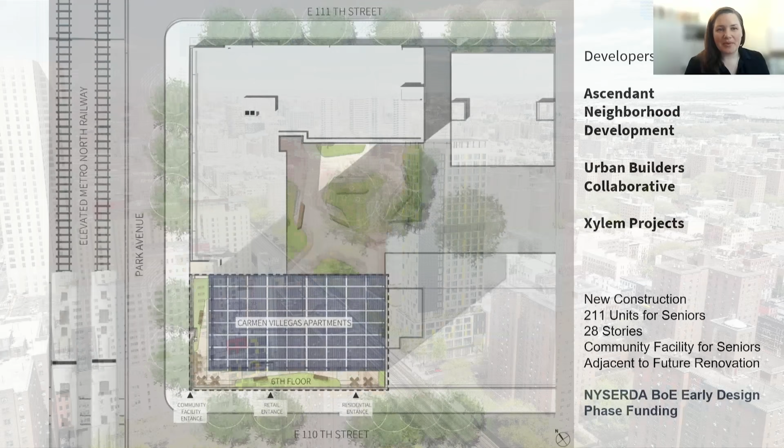Here at MAP, we are continuously searching for answers to these questions. Over more than 3 decades, we have designed 100 multifamily affordable housing developments. We believe architecture now has the tools at hand to get us close to carbon neutral and even reach for regeneration. In the next few minutes, we'll focus on how we approach the path to regenerative architecture through the lens of one project example. This Carmen Villegas Apartments project is a new affordable housing building located in Harlem for seniors from the community. In the future, the owners will conduct an energy renovation on the existing building on the adjacent lot to the north. So the new building design will be mindful of ways to plan for that as well.

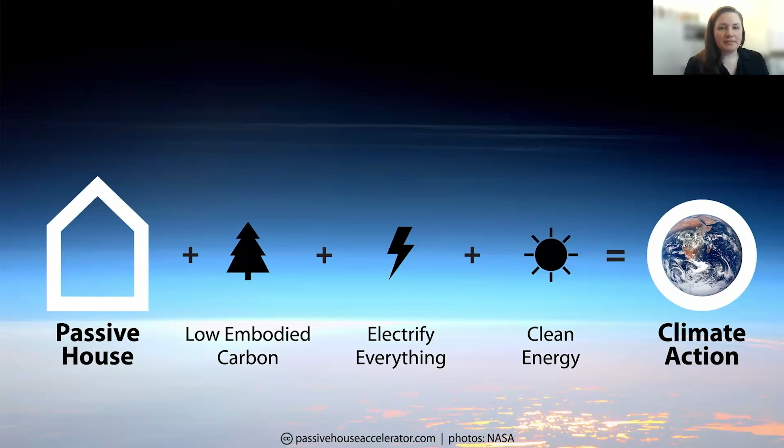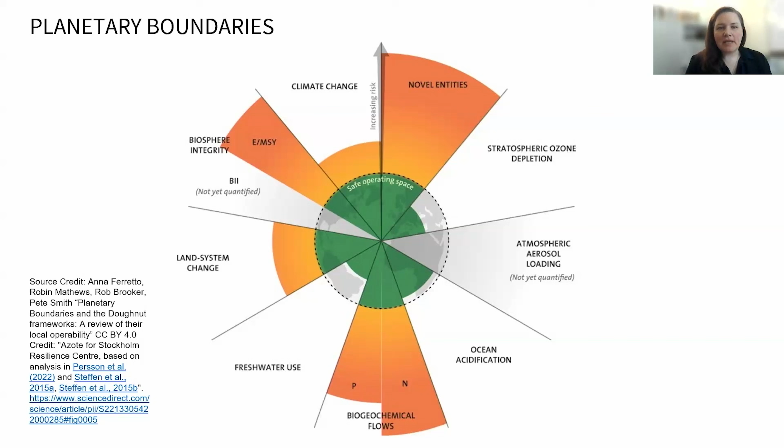The approach outlined here by the Passive House Accelerator and supported by many others is an excellent formula for addressing the climate crisis and allowing us to reach for regeneration. We are focused on the climate crisis, and rightly so, but it's important to remember that we're ultimately protecting biodiversity and healthy ecosystems that provide clean air, water, and nutritious food. The focus on climate is important, though, for sure, because if we have an unreliable and out of whack climate, this makes all of the other planetary boundary issues exponentially harder to solve.

So here are the other categories of actions we would add to the climate action formula to address those other boundaries. Every industry is expanding their view of what their impacts are, taking more responsibility. We are witnessing in real time this occurring in the construction industry, which is working to establish ways to measure the impacts of these actions and develop the tools to document and analyze them synergistically.

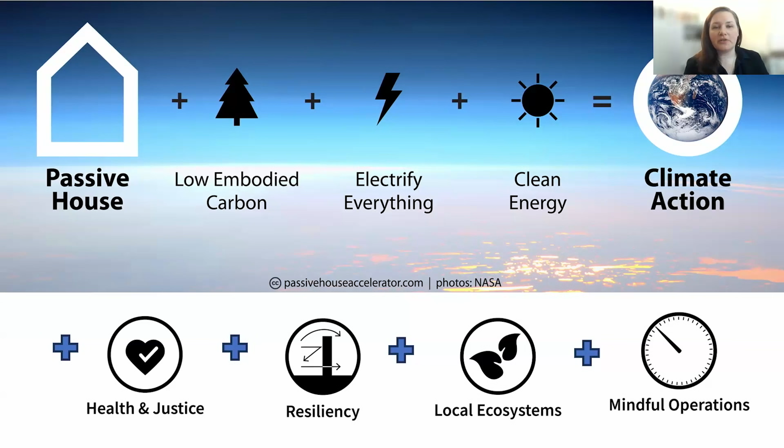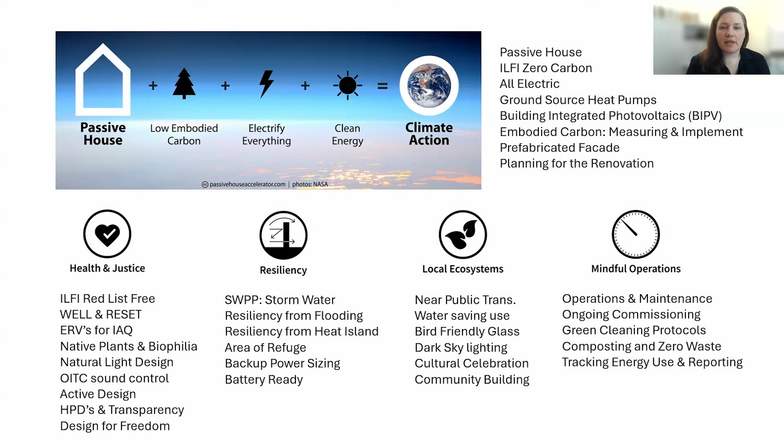You can see by this more detailed summary that there are many actions we can take towards carbon neutrality and reach for regenerative architecture. Many of these are overlapping categories, and they all reinforce each other. Some of them are even code minimum in New York City. Most here are being deployed by this project or being studied closely through the NYSERDA Buildings of Excellence Early Design Phase funding, with the entire project team of the owner, designers, engineers, and GC working together to figure out how to achieve these goals.

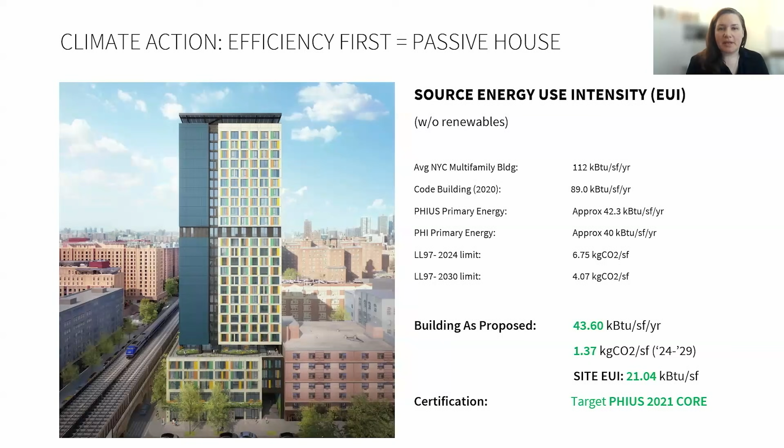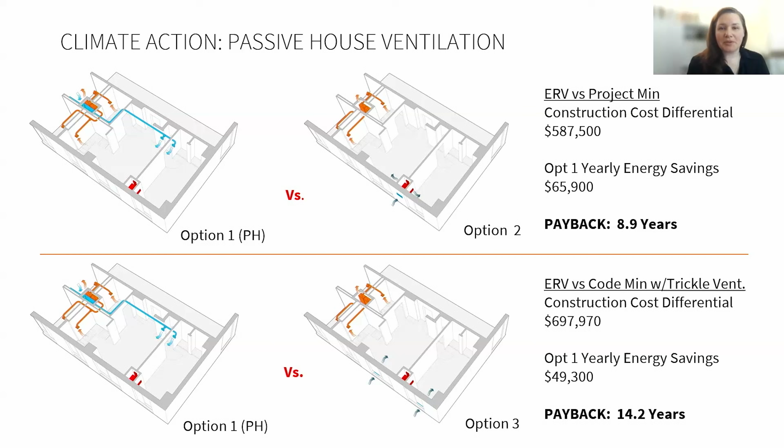To start, we begin with passive house design because it's the healthiest and most reliable way to achieve extremely low energy use. The project is committed to PHIUS certification. Before the project was able to commit to passive house, we needed to decide on a ventilation system to keep the project moving. So using a portion of the BOE early phase funding, we focused on calculating the construction cost and energy savings differentials between exhaust only and energy recovery ventilation. The paybacks shown here were acceptable to the team, and we locked in the ventilation strategy first.

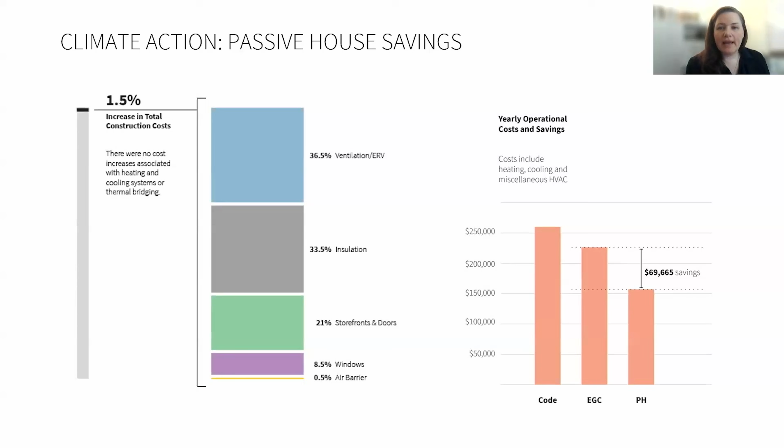Soon after, we were able to determine the upfront additional costs of passive house design and certification. With a baseline of affordable housing that's already 15% better than code, as it's required to be to receive any public funding, the additional increase was only 1.5% of total construction costs. This number, though, doesn't even yet calculate the savings from the smaller heating and cooling system, which we will calculate soon. And the yearly operational savings are about $70,000.

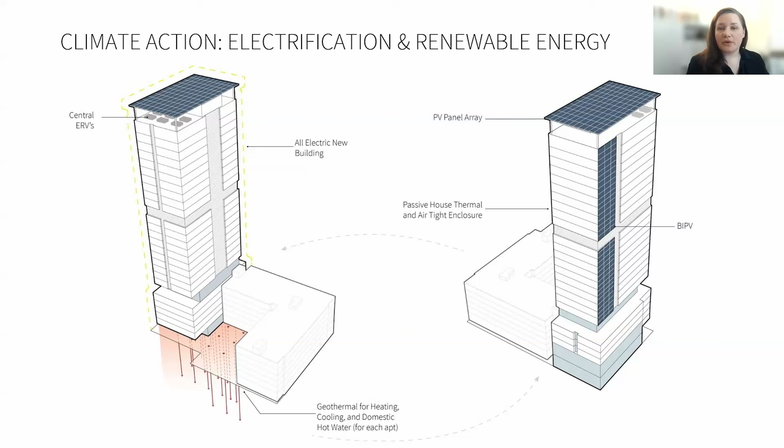The building is also all electric and will be provided with heating, cooling, and hot water by ground source heat pumps. The bore field is intended to be sized to reserve excess capacity for the adjacent renovation. A south-facing portion of the rain screen facade cladding will be building integrated photovoltaics, and there will be solar on the roof as well. Given that we have significant on-site energy resources and a low energy building, we are in the process of studying exactly how close we can get to net zero operational carbon.

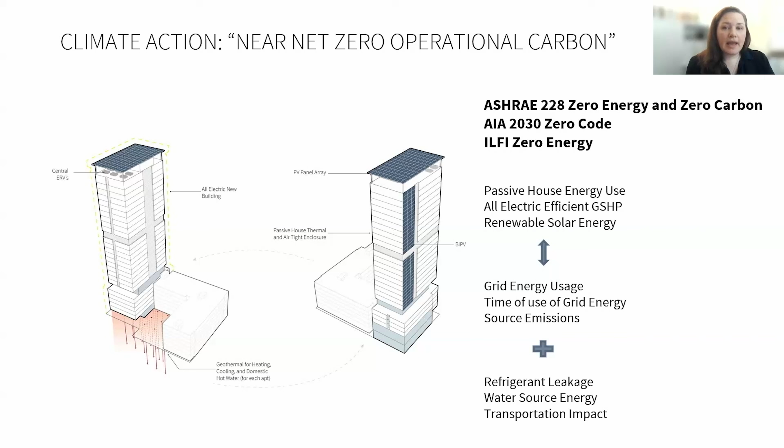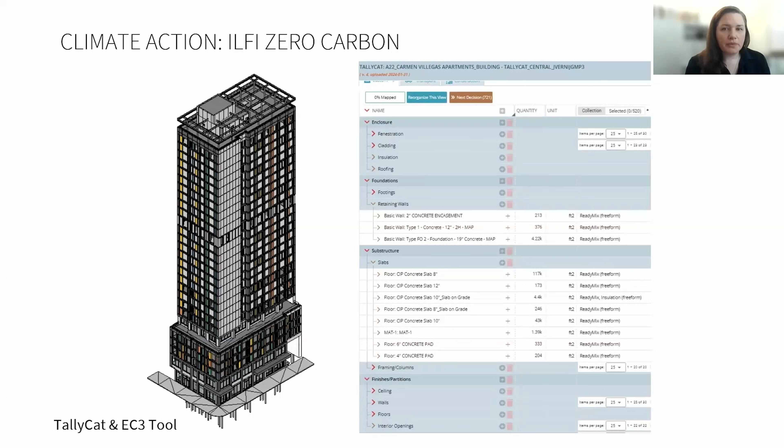There are several standards out there now, and more are being developed that help guide these calculations. They typically involve conversion to time of use, which takes into account the carbon intensity of the grid. And they calculate refrigerant leakage and other operational uses. We need to be mindful of the upfront embodied carbon we are spending in order to create this near net zero building and make sure we are hitting the sweet spot where we optimize both with the tools we have at the moment. To that end, the industry needs to increase our capacity to measure embodied carbon, so we are modeling using the TallyCat tool, which is connected to the EC3 tool.

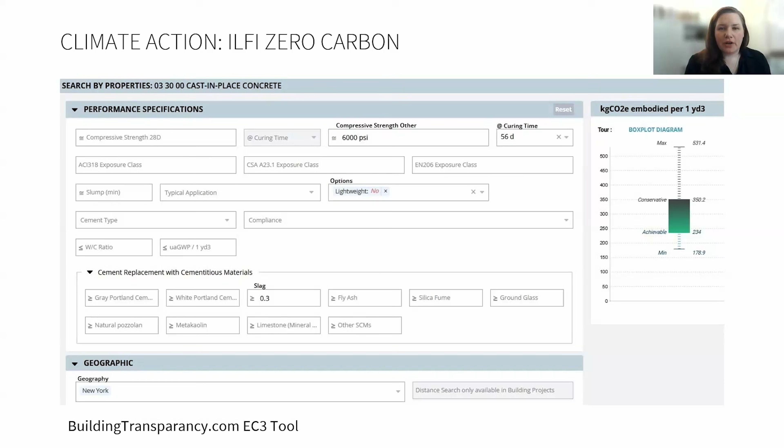The team is examining closely how we can lower the embodied carbon of each material. For example, we are using a combination of the search capabilities of the EC3 and collaborating with our GC's concrete suppliers to get the lowest mix possible. And we have a good start on this project by using prefabricated facade panels by Dextall.

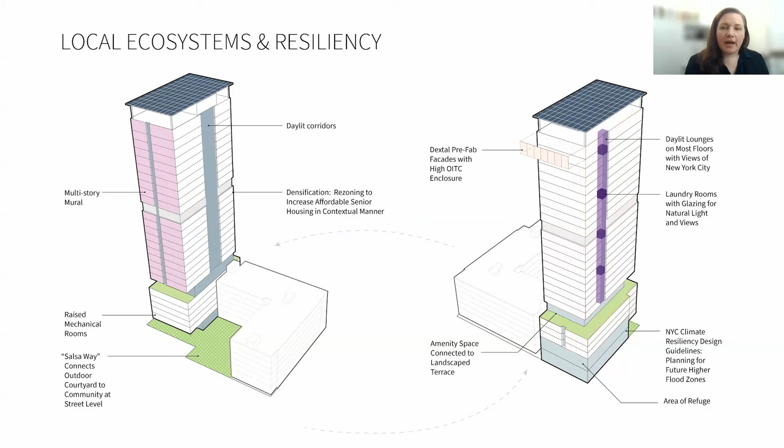The design honors the neighborhood's artistic culture with a large mural on the east facade and in the ground floor breezeway. This building is not currently in a flood zone, but it will be within its anticipated lifetime, according to the city's projected mapping. So the project will follow the requirements for flood zone resiliency, has a raised entry lobby, and the mechanical rooms are on the second floor. There will also be an area of refuge for the community.

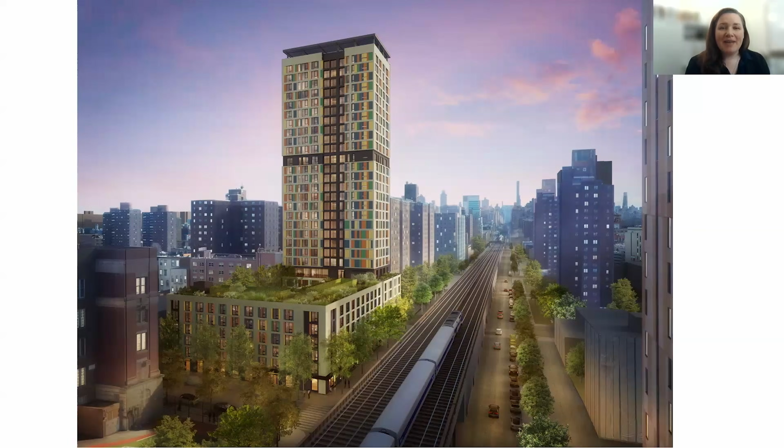With strategic support, such as from NYSERDA Buildings of Excellence program, we can leverage this exciting moment the industry is in and move the market forward towards regenerative architecture.

Thanks, Sara. That was wonderful. And again, very cool stuff. Everything that's in the building, everything we're learning from this, it's yet another great BOE project. I'm introducing Grayson Jordan, principal at Paul Castrucci Architects, who will be presenting the Bethany Terrace project, another Buildings of Excellence project.

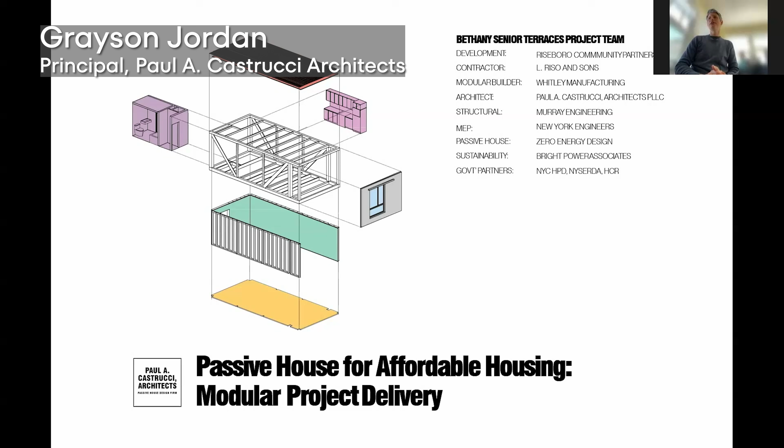Hello, my name is Grayson Jordan. I'm the principal architect of Paul A. Castrucci Architects. We're a full-service architecture and sustainability consulting firm located in the Lower East Side of New York City. We specialize in affordable housing and also in passive house buildings. I'm here to talk today about how to deliver passive house affordable housing using the modular project delivery method.

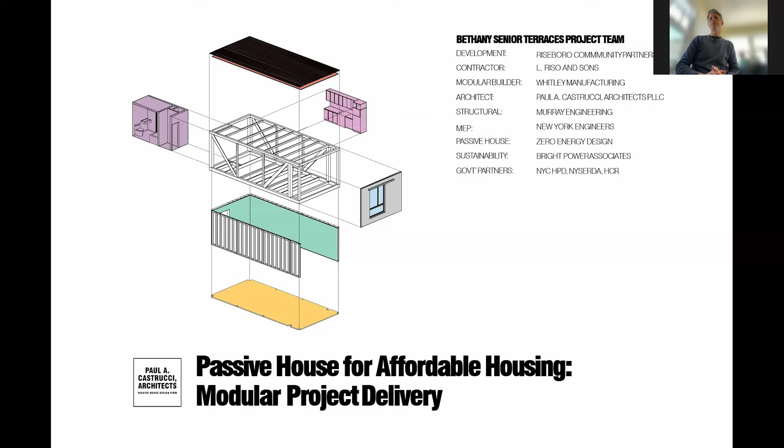Let's start with the why. Why do we care about affordable housing? It's critically needed. New York is a city of 8.5 million people with less than 400,000 affordable housing units. So we need to preserve existing affordable housing and we need to build new affordable housing. At the same time, we know that buildings in New York City account for nearly 2/3 of all of the carbon emissions in the city.

So on the one hand, we have to build and preserve. But on the other hand, we need to do that in a way that's actually not increasing carbon emissions, both embodied and operational, but actually driving it down. So deeply energy efficient, low embodied carbon, new construction and preservation.

Lastly, we are always looking to make places not just new affordable housing, not just energy efficient, but wonderful places to live, places people want to be, places of connection filled with light that are comfortable. And so we have a lot that we're trying to accomplish, often with limited budgets. So we need to explore new ways of building to get more value out of each project.

That brings us to Bethany Senior, a 60-unit affordable housing for seniors building that we're in the construction phase of in Brooklyn, New York. We're doing this with the developer RiseBoro Community Partnership, one of the leaders of affordable housing and passive house in New York, that brought us on the project. And very early in the project, we mutually said, modular is something that seems to make sense for this typology. Let's jump in with 2 feet and figure out how this works.

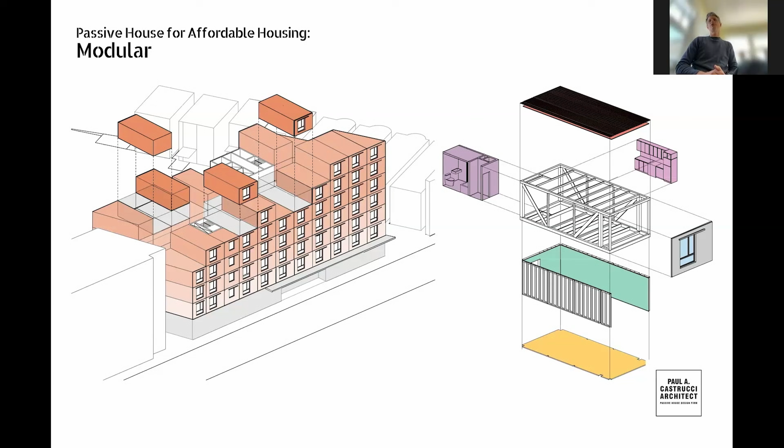Just to note, when we're talking about modular, we're talking about 3-dimensional boxes that are built off-site, shipped to the site and stacked up almost like little Legos on site. This is opposed to something else that our firm and many other firms are doing, which is prefabricated wall panels. I also heavily encourage exploring this avenue, but prefabricated wall panels is more putting panels on superstructures built on site. Today, we're talking about 3-dimensional modular.

When we think about modular, the first thing we would want to know is how is this going to affect our design process? We have to think about things a little bit differently. First of all, we have to think about transportation and staging. We're seeing here a delivered modular box. So the first thing you need to know is, how are we going to get this box from the factory, in this case in Pennsylvania, to New York City? We're going to map out all the routes. We're going to look at bridges, tunnels, any obstructions, and that's going to help shape what each mod looks like.

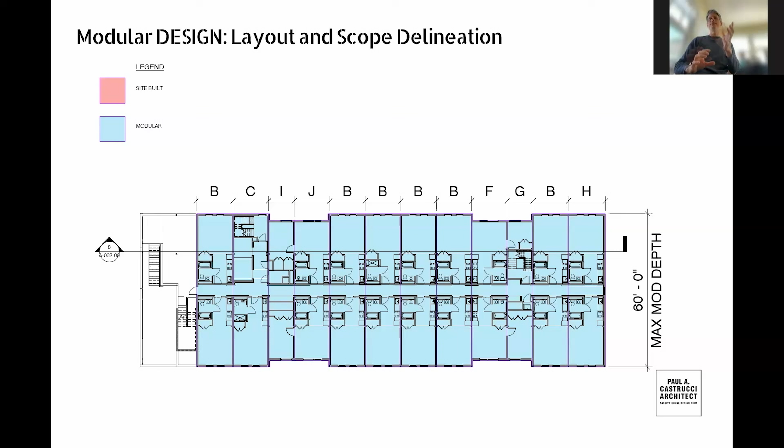Then at the building planning stage, we're looking for hyper-rational layouts. We're looking for repeatable, very efficient layouts. This can lead to, if you don't do it right, some sort of formal stagnation. So we have to take these very rational units and lay them out in creative ways. But with modular, it's very important to stay hyper-rational in your layout.

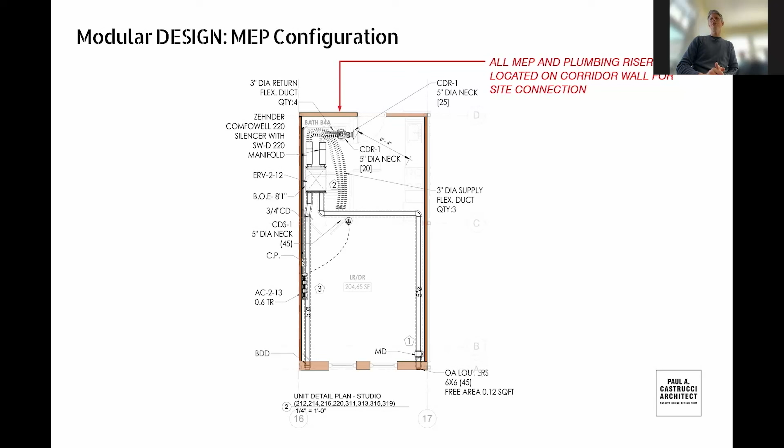We're also going to look at our MEPs quite differently. We're going to completely build all of our plumbing and mechanicals in the units, and then put all the risers on the corridor so they can be easily connected in the field. This is quite different from traditional construction. And finally, we know that design isn't just a series of technical decisions. We care a lot about conceptual and aesthetic response.

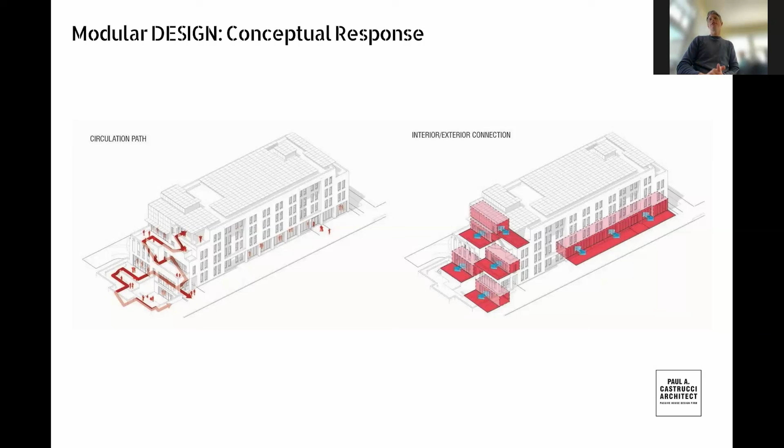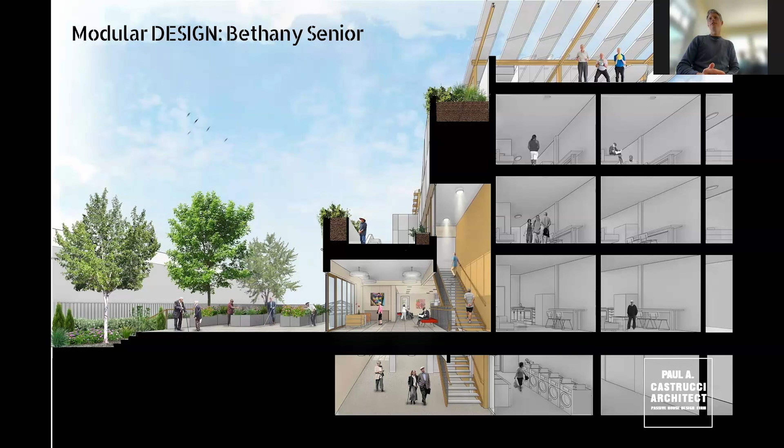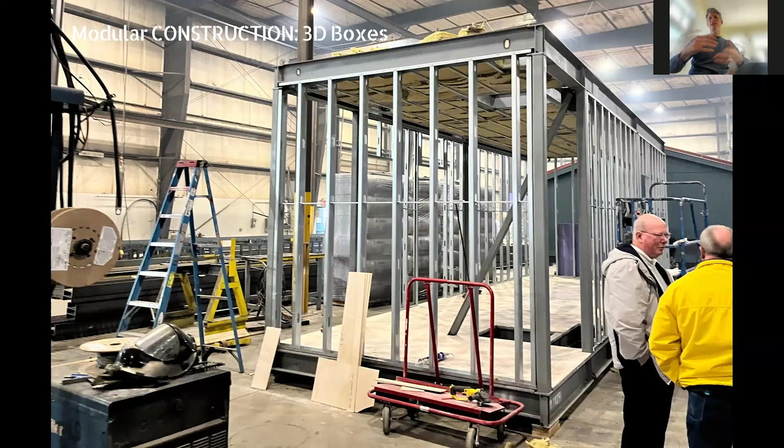We start to fill these in with stud construction. Then we layer in all the rest that goes in the building, again, sort of on an assembly line approach. We're going to put all of our insulation, all of our electric, all of our plumbing inside and build it actually in these units, and then follow up with finishes.

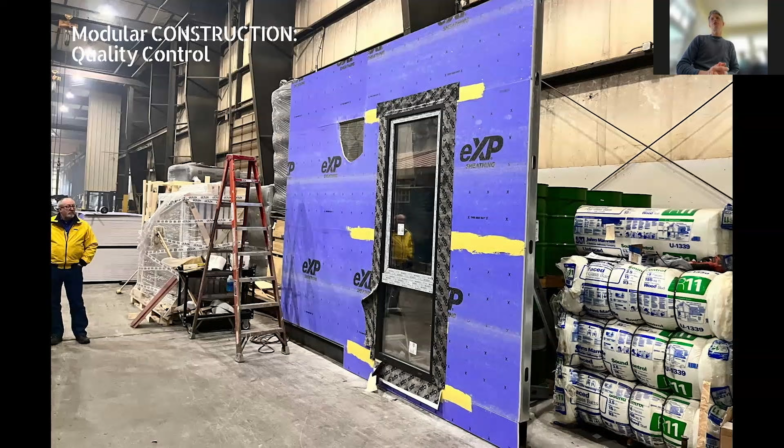One thing to note, quality control. Quality control is important on any project, especially with new partners. I think modular gives us greater ability to quality control. We can do this all inside. Here we're looking at a very important detail for Passive House, which is the window detail. And we did this a few times. You can see we've done a pull-up test on the bottom left, and we had this detail redone until we got the adhesion that we wanted.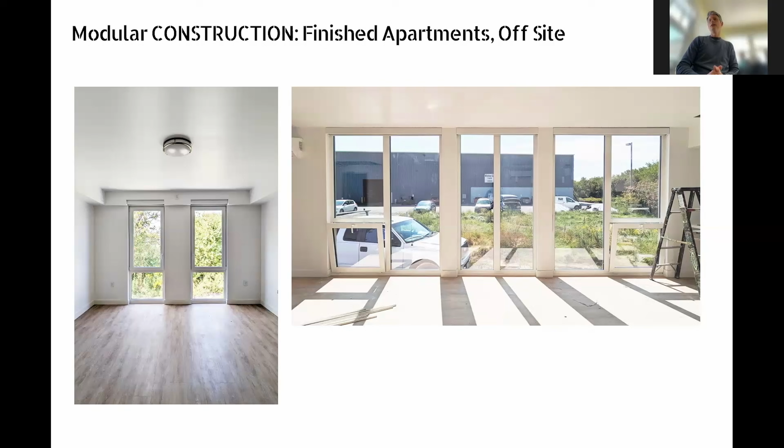Finally, one thing to note, in this modular construction, these units are nearly done in the factory. So we're looking at finished apartments, finished floors, finished ceilings, kitchen cabinets, plumbing, almost everything except for the appliances, which are shipped loose so they don't rattle around during shipping. And this is done in the factory and then shipped to site and stacked up.

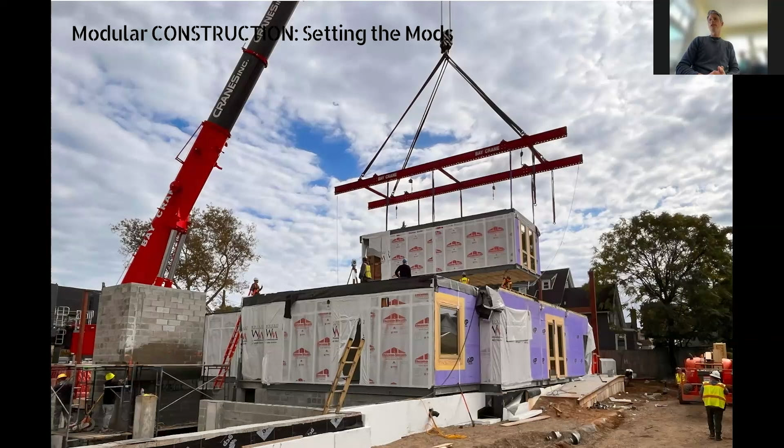We start with the foundation. The foundation is done while we're building the mods in the factory. And we'll get these stacked up from nothing, just the foundation, up to a 4-story, 60-unit building in 2 weeks. And so that's going to be 60 units of fully completed apartments stacked up in 2 weeks. There's a bit of work to do after this is set.

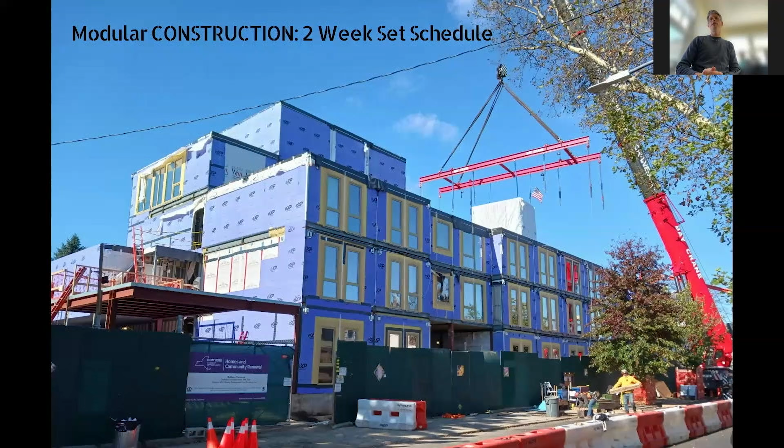As you can see, there's quite a bit of exterior work. So all of the exterior air barrier and insulation and finish systems happens after the stacking. And then, as we noted before, there's quite a bit of connecting mod to mod of your sprinkler, your plumbing, your electric systems in the corridors, and the corridor then has to be finished. And there's some ship loose items such as the appliances that we're seeing here. And if we have, in this case, very large light fixtures that we don't want swinging around, those will be installed in the field as well.

To summarize, this is our first modular project. I think in many ways it's a good success. We learned a lot of lessons. I think this is a strong way of building that we should be doing more of, and we should be sharing our lessons learned, because I think that this is a way, especially in affordable housing with reduced budgets, to get really exceptional buildings, passive house level performance at the same cost or even reduced cost.

Enjoy. Thanks. I'm presenting our 3 buildings that won the Buildings of Excellence Award from NYSERDA in recognition of their ultra-low energy design as the first passive house projects for the Hudson Yards area of Manhattan. The site, Hudson Yards North, is located immediately above the new skyscrapers that define Hudson Yards. Midtown lies to the east with major bus and rail transport hubs nearby.

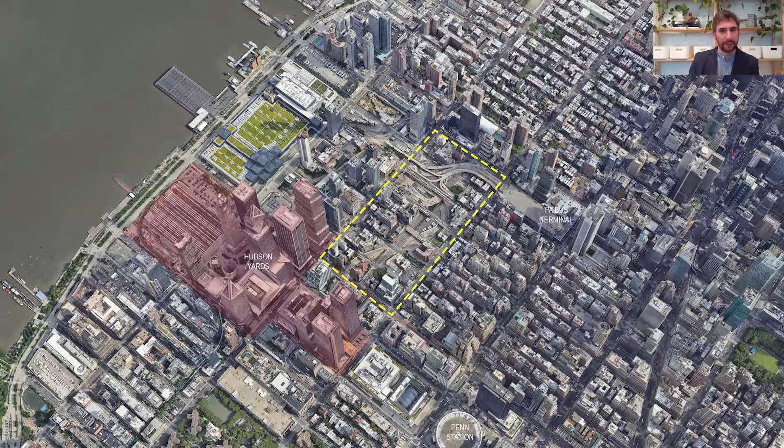Unlike the surrounding context, the blocks of Hudson Yards North are marred by the Lincoln Tunnel infrastructure carved out of them, resulting in a heavily trafficked, relatively lightly developed neighborhood. These 3 buildings are located across 2 sites. 2 buildings are corner sites that face 9th Avenue and back onto the Lincoln Tunnel entry. The third is an infill site at West 36th Street, near where the tunnel exit meets the city grid.

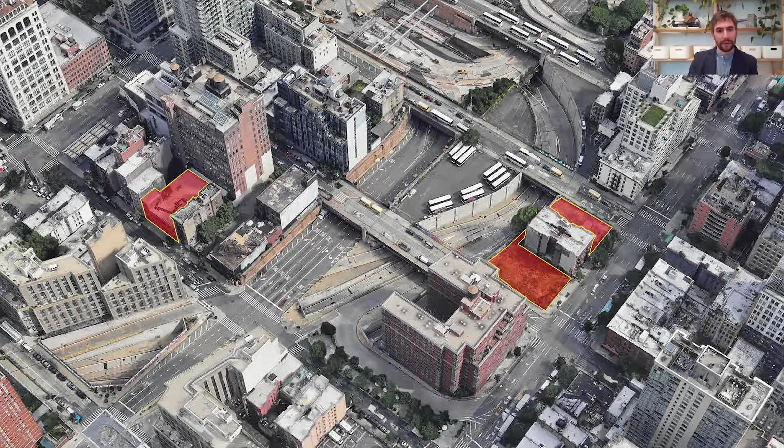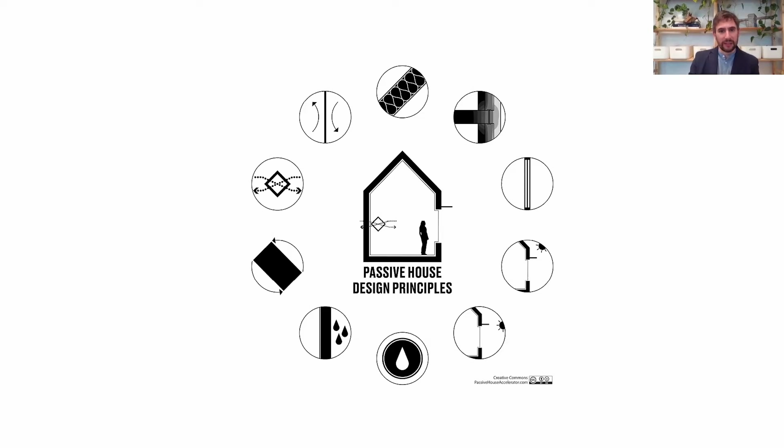We pushed for passive house early on in this project, which the client was quick to embrace, as this would not only be appropriate from a macro environmental standpoint, but would also impart many micro environmental benefits for these particular sites. A healthy, quiet, and comfortable environment for the end user is a valuable sales pitch when your neighborhood is one of the most heavily trafficked areas of Manhattan.

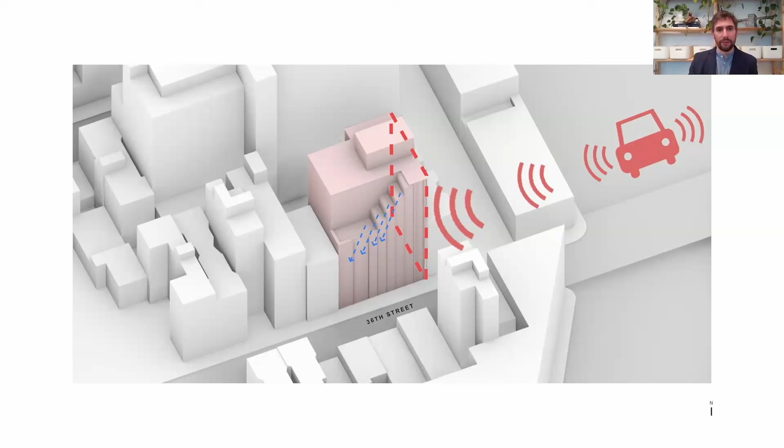Both of these sites fall under a contextual zoning district, which limits the permitted height and dictates specific setback requirements. Working within this framework, the 36th Street site was configured to orientate itself away from the heavily trafficked tunnel exit and provide views, particularly for the upper units, towards the river and the new Hudson Yards development. In plan, this meant pushing the cores to the easterly side of the site with unit arrangements organized efficiently around them. This also allowed for a maximum commercial footprint at the ground floor.

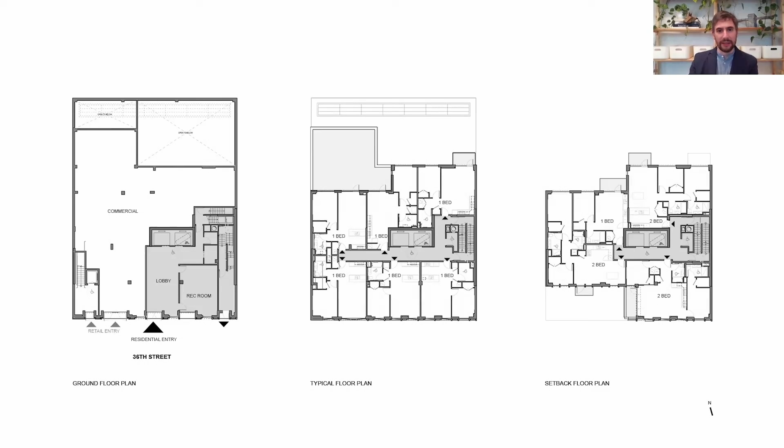At the setback floors, a permitted dormer extends the building to the street line at the southeast and reduces at each floor in accordance with the permitted zoning envelope, resulting in the tiered massing. This massing informed the cladding design that is expressive of this gradual stepping with projecting vertical fins that curve to become horizontal at the respective terminating floors. In addition to the aesthetic expression, these fins also provide passive shading to the windows and reinforce the idea, even at the lower floors, of orienting the views toward the west.

Looking at the facade in greater detail, the cladding is a composition of ultra-high performance concrete panels, or UHPC in short, with metal infill and metal spandrels. The panels are organized in a double height stagger pattern, which reinforces the tiered massing and produces a tectonic logic for the cladding. A slight tonal differentiation in the cladding delineated the setback portion from that of the street.

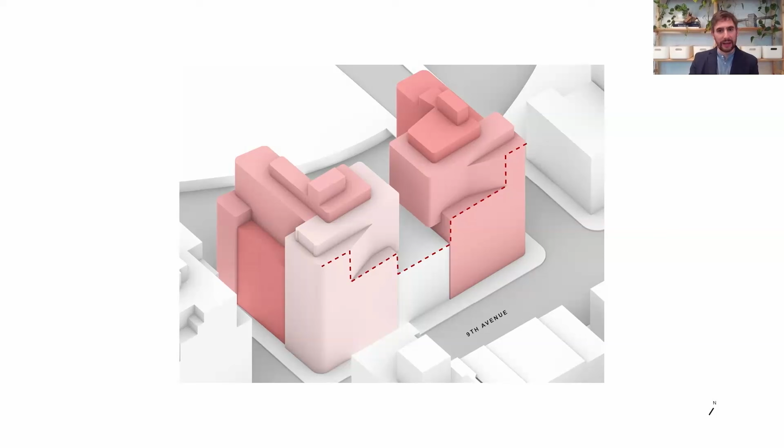The 2 buildings at 9th Avenue have a very different contextual relationship, as both buildings occupy a corner site with the sunken tunnel entry at the rear, making every elevation visible from the street. On 9th Avenue, we wanted to be respectful of the existing building, which in order to use up all the floor area available is being cantilevered over. To that end, we stepped the street wall up from the middle with the greater bulk located at the corners. At the back of the building, we opened up 2 courtyards to provide light and air to all the residential units, which also opened up the opportunity to introduce daylight into the cellar spaces.

As the contextual zoning required setbacks, we worked within these parameters to inform a massing that is broken up through subtle changes in the street wall, as is further expressed in the cladding articulation. In plan, each building has a double height lobby and a recessed entry off the side street. This gives a residential entry that is both generous and formal, but also expresses its semi-private nature. Pushing the residential entry to the side street allows the 9th Avenue frontage to be fully dedicated to commercial uses, adding more life to this stretch of 9th Avenue.

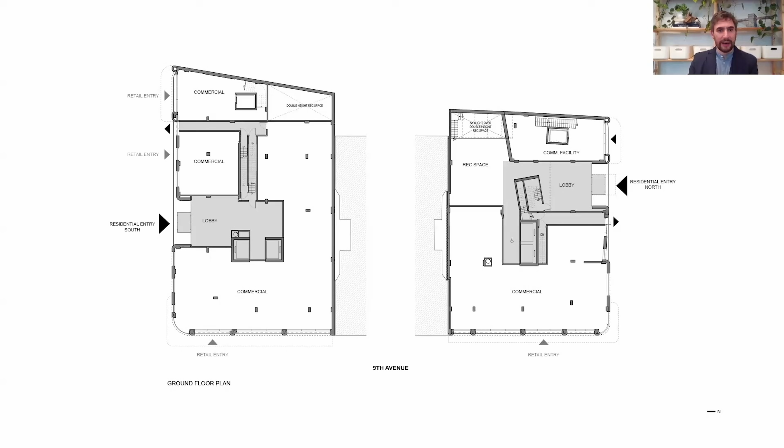As we move up through the residential floors, we can see how the courtyards serve to give light, air, and views to the rear-facing units, but also open up the elevator lobbies to receive natural daylight as well. The buildings take advantage of the unique setting to provide generous curved windows at the corner, thereby opening up expansive views for many of the units.

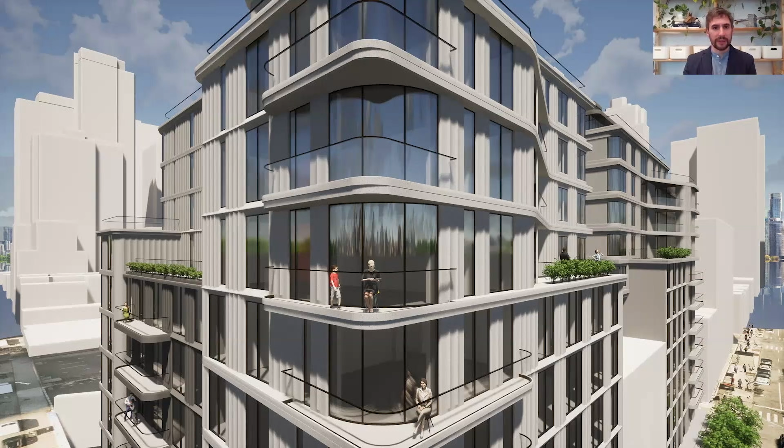The curved corners represent a softening of the building form, which is picked up in a cladding expression of subtly fluted, repeating vertical elements bisected by stronger horizontal lines. Sometimes these are simple floor delineators where the slope helps to express the vertical fluting, elsewhere they become a stronger datum, either forming a horizontal articulation on the facade or projecting deeper to become a balcony. Like our 36th Street building, these 2 buildings are also clad in UHPC panels. Subtle variations of the cladding tone differentiate the various forms as expressed in the earlier massing slide. In addition to providing spectacular views, the curved windows also open up the opportunity to have more generous balconies within the limited projection permitted over the property line in New York City.

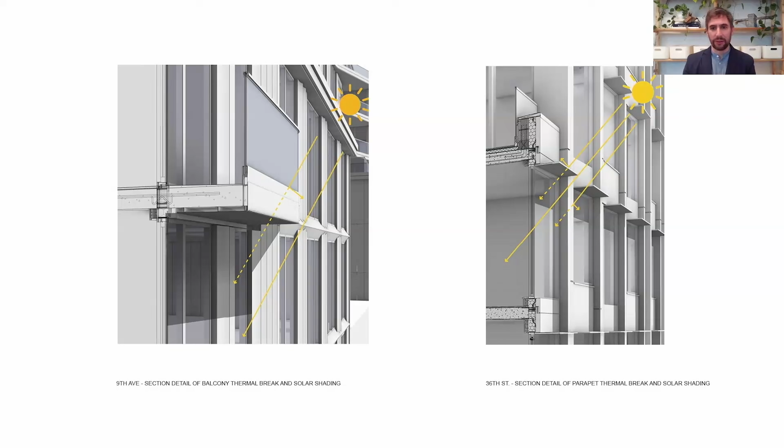Both buildings benefit from a shading strategy integrated into the cladding design, whereas 9th Avenue utilized balconies and horizontal articulation to provide shading to a significant percentage of the windows. 36th Street achieves this through both the vertical fins discussed earlier and a horizontal sunshade that forms part of the window system. In order to maintain the continuity of insulation, both buildings utilize concrete thermal breaks in the balcony construction and in the upstands at roofs. With the upstands, this was particularly beneficial in maintaining the continuity of insulation while also providing a simple fixing zone for the parapet cladding and railing without having to worry about additional roof penetrations.

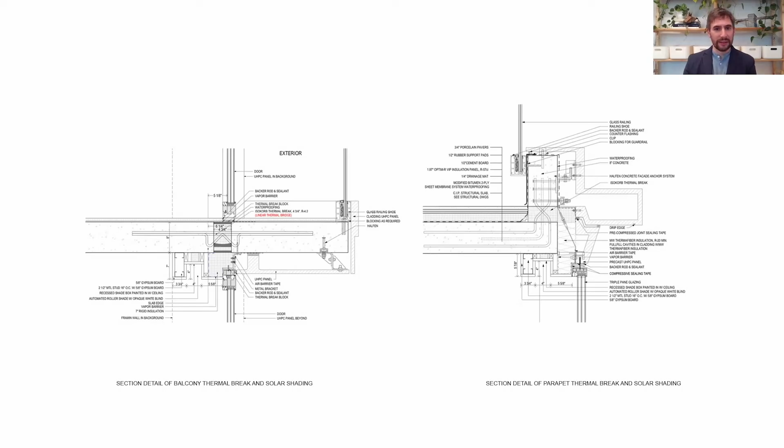The facade in all three buildings will be built using a panelized construction system where the cladding, windows, and insulation all arrive on site as a single prefabricated unit. UHPC has exceptional strength and density, meaning a typical 10-foot by 10-foot panel only requires 4 points of fixing, minimizing the amount of thermal bridging.

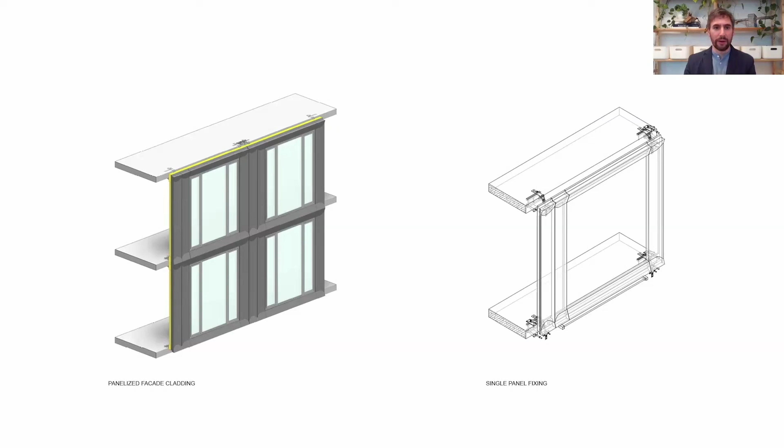The properties of UHPC itself allow it to act as a water and air barrier for the building. The strength of UHPC allows it to support the window and all required design loads without the need for a structural backup wall. In detailing, we had to carefully consider the joints between panels, a keyed panel design, vertical joint system, and sufficient seal to ensure there is a positive drainage route and multiple lines of protection.

The placement of the windows within the panel was carefully considered to balance the requirement for the cladding to support the windows while providing sufficient thermal continuity with the insulation.

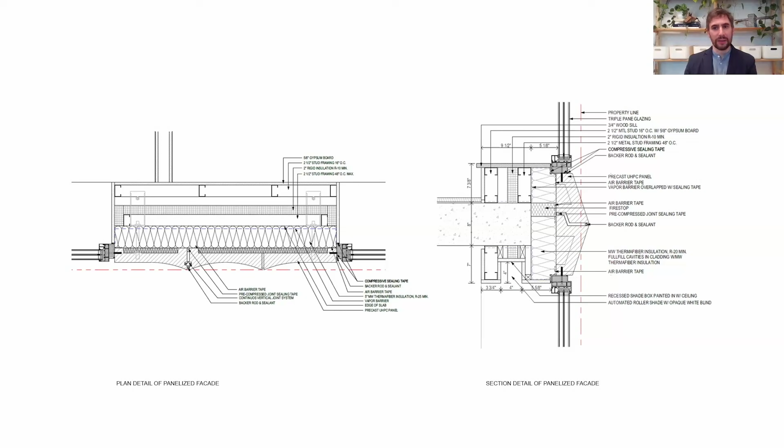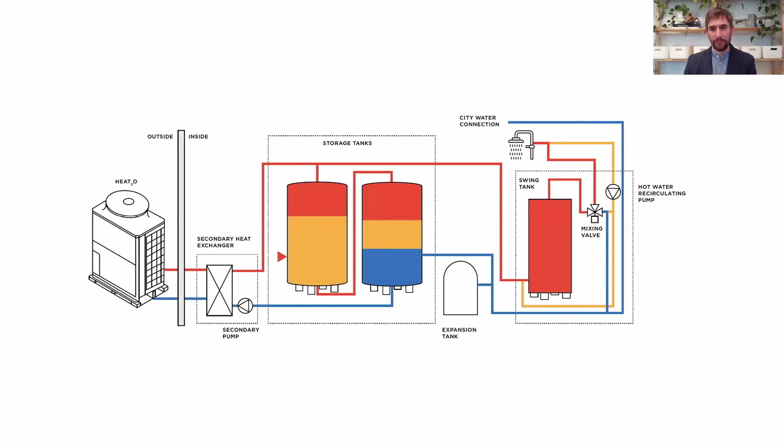Both buildings utilize air source heat pumps for heating and cooling, allowing every unit to have control of their own conditioned space. In 37th Street, hot water is provided through individual heat pump water heaters in each unit. In the 9th Avenue buildings, hot water is through communal heat pump water heaters with storage tanks in the mechanical bulkheads. All the buildings utilize energy recovery in the ventilation system.

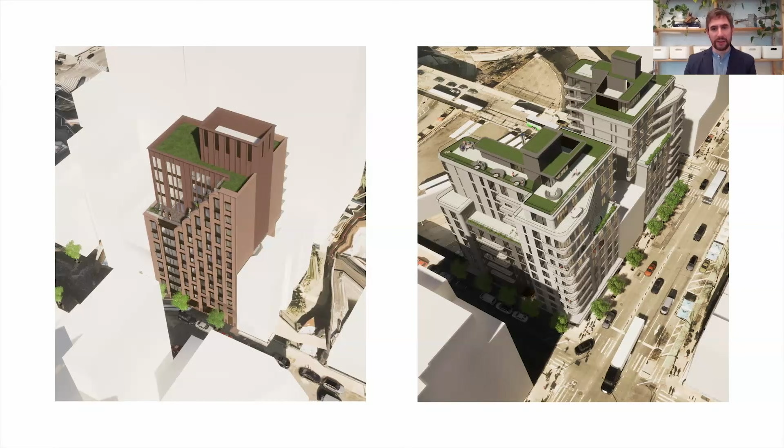There were a number of challenges we had to overcome to achieve a passive house design in these projects, but we believe the main takeaway is that if passive house can be achieved on complex sites like these, there's no reason it cannot be replicated across the city. We equally believe that achieving passive house does not need to mean sacrificing well-considered design in the pursuit of performance.

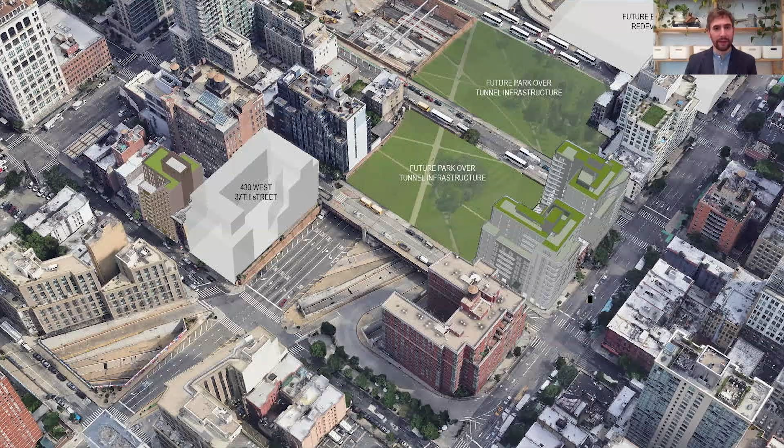We look forward to seeing these three buildings come to fruition over the next couple of years and the transformation, in concert with other developments happening in the neighborhood, that they will collectively have on the area, both urbanistically and in inspiring a new crop of high-performance buildings.

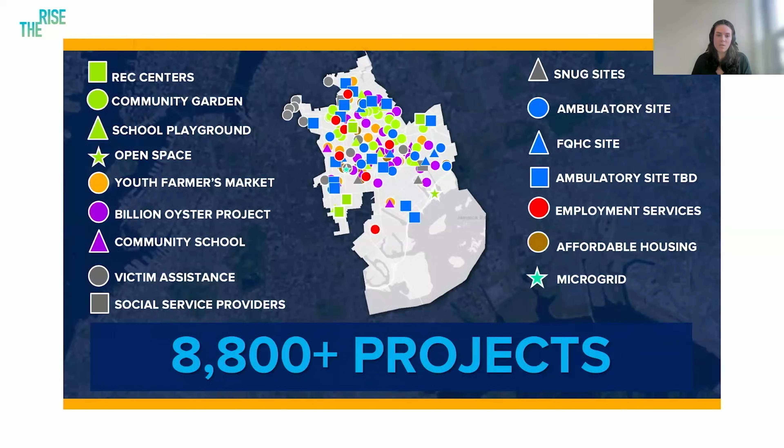The developer of the RISE is a woman-owned firm, Xenolith Partners. They were interested in providing housing for formerly incarcerated women, recognizing the need at this particular location. They've teamed up with other like-minded partners to create a project that is focused on lifting up and supporting these women, hence the name, The RISE.

To this end, their goals were to deliver quality housing and create a safe, healthy, and supportive environment to help rebuild successful lives; to make this a high-impact project that maximizes the co-benefits of integrated strategies; to partner with local organizations to provide targeted comprehensive programming; and to deliver all of this in a highly sustainable and beautiful building that serves as a focal point and a source of pride in the neighborhood.

The project team consists of Magnusson Architecture and Planning, where the credit goes for all these presentation images. MAP is an experienced passive house architecture firm focused on retrofit and new construction affordable mixed-use housing. The general contractor for the project is Bruno Frustacci Contracting. The MEP designer is Dagher Engineering. The landscape designer is Terrain NYC. And Bright Power, where I work, is providing the Passive House and Enterprise Green Communities certification and verification. The project is currently design certified for PHI and EGC and is over 50% constructed.

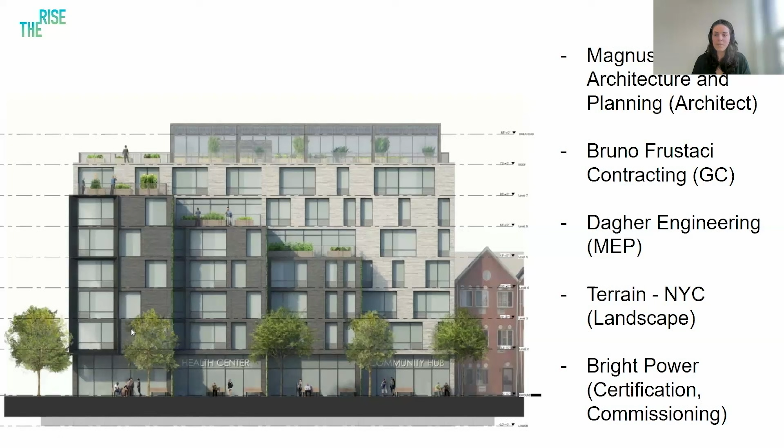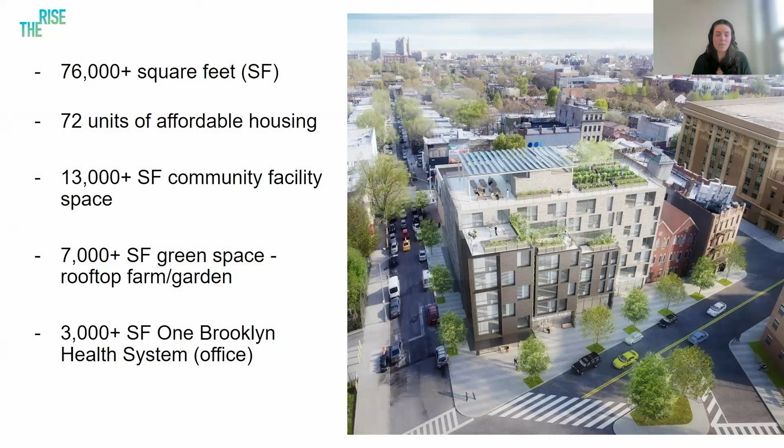To deliver the certification goals, the team designed this 7-story all-electric passive house multifamily building, which contains a large community facility space on the lower levels and a garden on the roof. It will provide services such as employment, training, fitness, arts, therapeutic gardening, education, and other programming together with the partners on the project.

Of the 72 units, 65% of the dwelling units are affordable and supportive for formerly incarcerated individuals and families. The remaining 35% are affordable for households earning 30 to 60% AMI, area median income.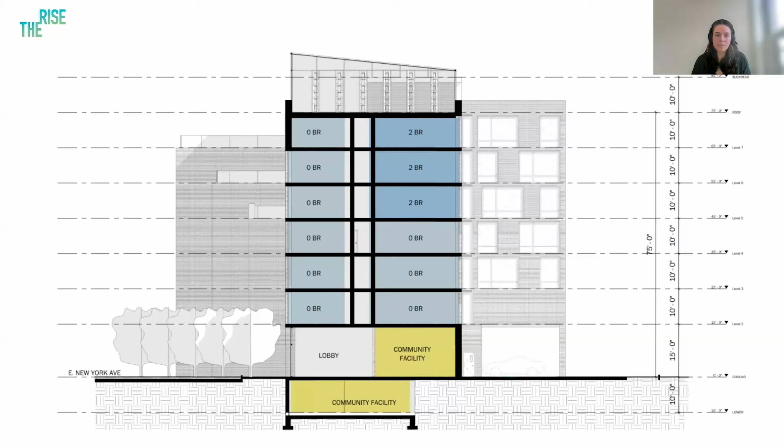The architect sought to make the goals of the project visceral to the design. The massing is generously set back at the main facade to create a landscape space at the street level, as well as stepping terraces that rise up towards the corner and are fully accessible to the residents. Their main roof functions as an urban farm and is open to both the residents and the community. Project Eats is the local partner that's providing programming and management of the rooftop gardens.

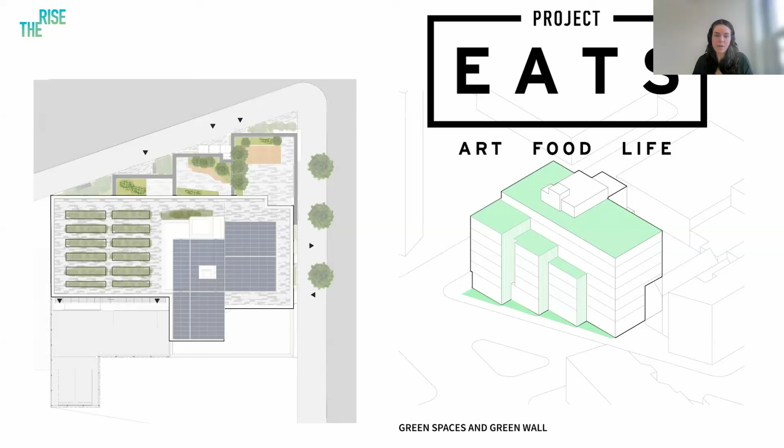Other on-site supportive services are provided through the Women's Prison Association, the Osborne Association, and other local organizations, including Community Capacity Development and the Brownsville Think Tank Matters. These organizations are providing education, job readiness, employment training, violence reduction, health and wellness, fitness, and arts programming.

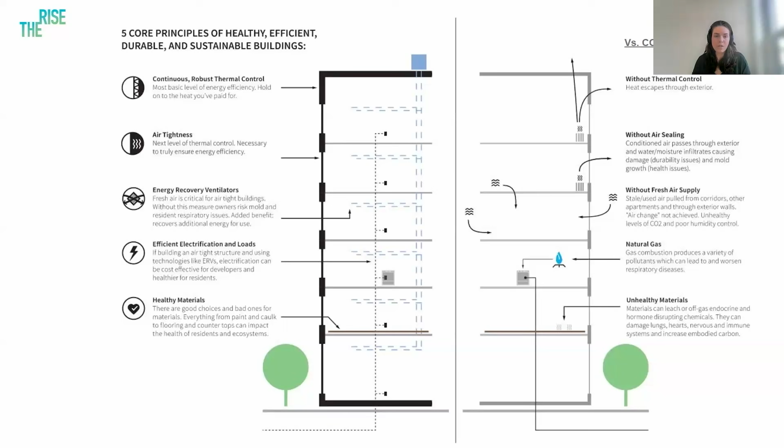Beyond the principles that make for a better and healthy environment for building occupants, the sustainability features included on the project are also incorporated to respond to the climate crisis that our planet is currently in. This helps to reduce and/or mitigate carbon emissions related to the construction and operation of this building.

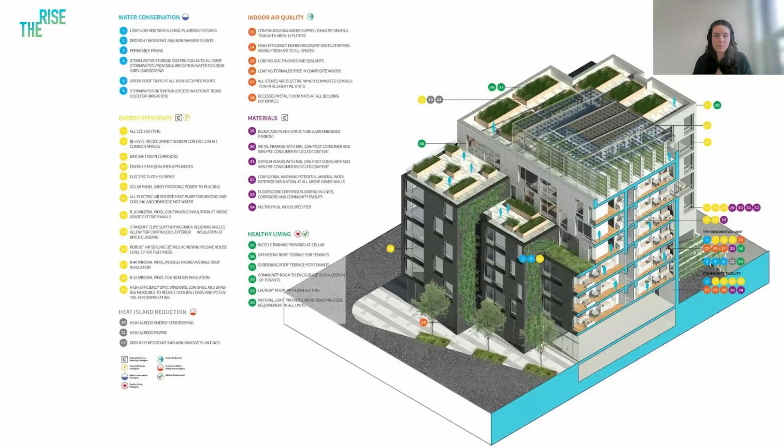The specifications of this project's robust passive house thermal enclosure far exceed code. The building massing resulted in a less than ideal form factor or surface to volume ratio, and the larger windows resulted in higher window to wall ratio. These were design priorities that were ultimately combated with triple pane windows, R40 roof insulation, additional thermal bridge mitigation strategies, and passive house level airtightness.

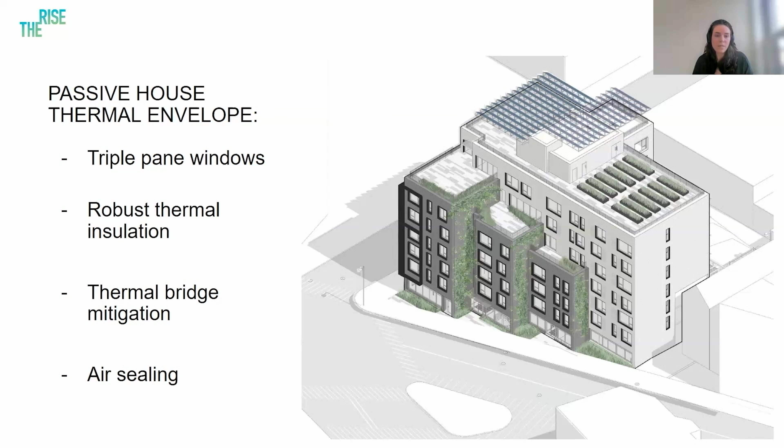To provide heating and cooling, we are using a common VRF split heat pump system with condensers on the roof. We must be careful with these systems as they require the running of refrigerant lines between the indoor and outdoor unit. Current approved refrigerants for this use in New York City have a high global warming potential if released through leaks. But if we are intentional, we can minimize the risk by optimizing the refrigerant routes. Usually in a small building, this means vertical runs.

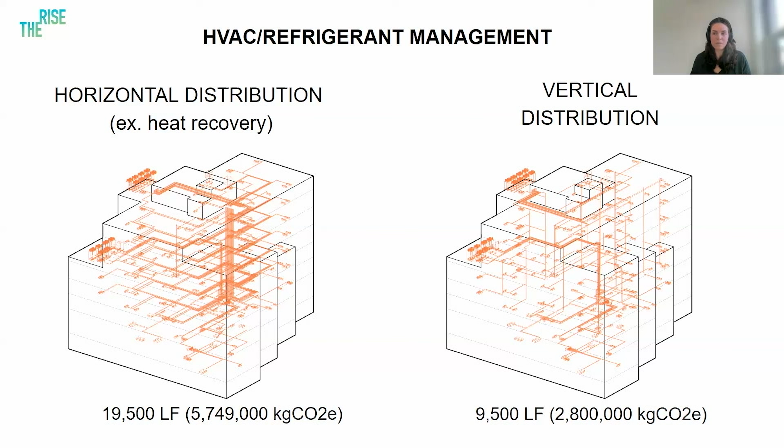If a project is focused on health, passive house is the best way to achieve good indoor environmental quality, which is dependent on your ventilation strategy and requires flushing out of contaminants and replenishing of oxygen. Contaminant control is achieved via eliminating interior combustion, meaning no fossil fuels exist within the building, having a smoke-free building policy, including walk-off mats at entrances, and achieving apartment compartmentalization, meaning reducing air leakage between units.

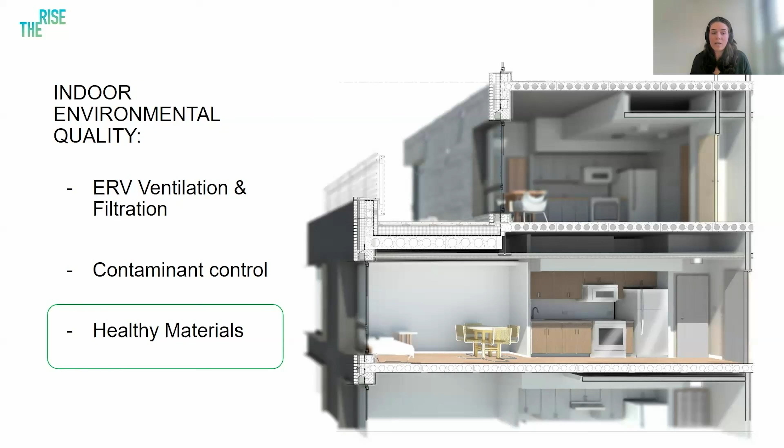Healthy materials are achieved by eliminating or calling for low VOC products, FloorScore and GREENGUARD finishes, calling for health product declaration or HPD in your specifications, providing solid cleanable surfaces, and a simplified material palette.

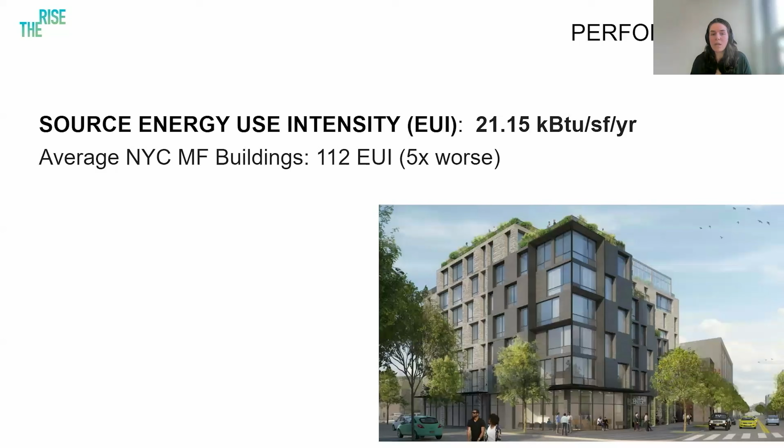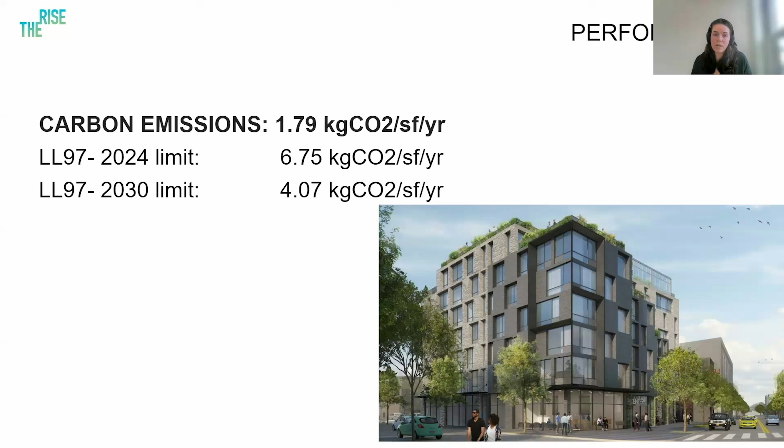The Rise has a predicted source energy use intensity of 21.15 kBtu per square foot per year, which is over 5 times as efficient compared to average New York City multifamily building stock, and 4 times as efficient compared to the 2020 Energy Code, which was in place at the time of design. The estimated operational carbon emissions are well below the threshold set by the New York City Local Law 97 through at least the 2030 compliance year limits. The site EUI is further reduced through the use of an on-site solar PV generation system to offset base building loads and sell back electricity to the already constricted grid infrastructure.